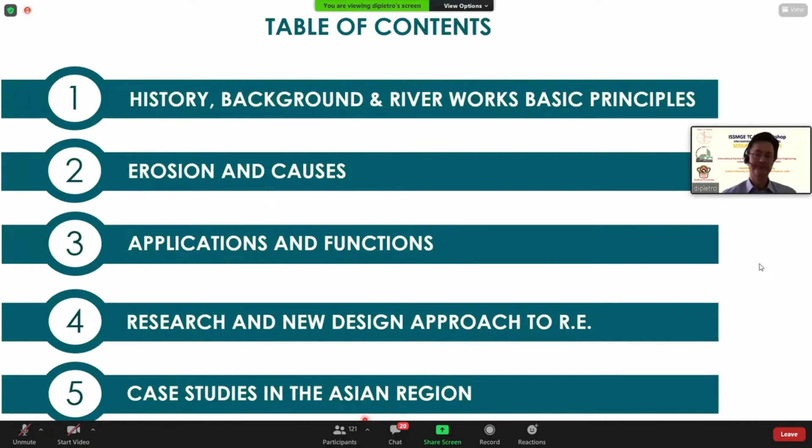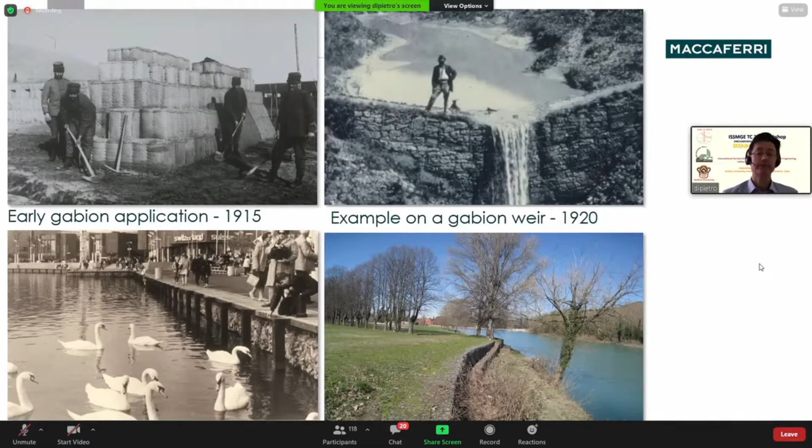But I would like to mention some basic principles when designing river works. The first postulate we learn from experience is that hydraulics is not an exact science.

When we design structures in river works, we make our choices based on current knowledge, know-how, and best management practices, assuming that natural events like rainfall, flooding, storms will be based on statistical data. This requires a cautious approach, and in most cases, to perform a risk analysis, analyzing scenarios beyond the design data assumed.

A modern and correct approach to river engineering requires recognizing two main types of requirements. The hydraulic requirements, meaning the base of technical knowledge, including evaluating the stability of a solution both from geotechnical and hydraulic points of view, using correct and sound engineering practices, design methods based on risk assessment and not fixed numbers, and considering how erosion will affect the surrounding environment. In other words, use an integrated river management approach.

But also, and most importantly, the environmental requirements, meaning to consider the river as a living environment. This requires understanding the rules, like the river being a dynamic environment that will change over time. In applying river engineering principles, minimize changes in the morphology and nature of the watercourse, and apply protection measures with proven ability to recover and reestablish natural conditions - that is, using sustainable systems. Finally, provide solutions aimed at balancing the ecosystems.

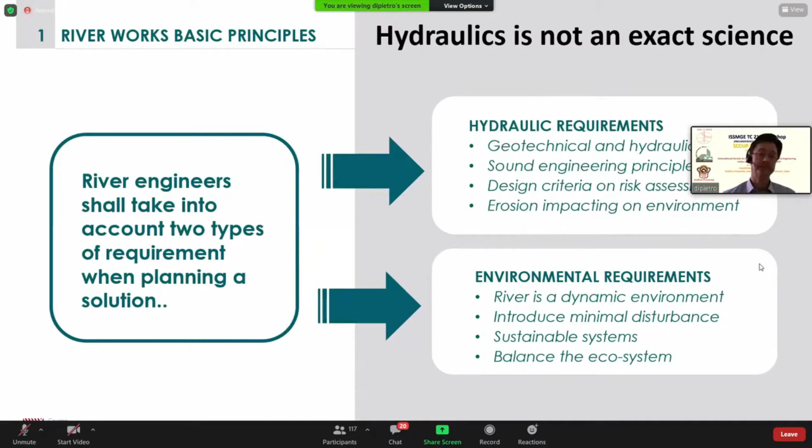River engineering requires starting from the location and characteristics of a watercourse, depending on whether we are in the mountains, at the foothills, or in the valley close to the river outlet. The three regions will be characterized by different climates, different soils, and different morphology.

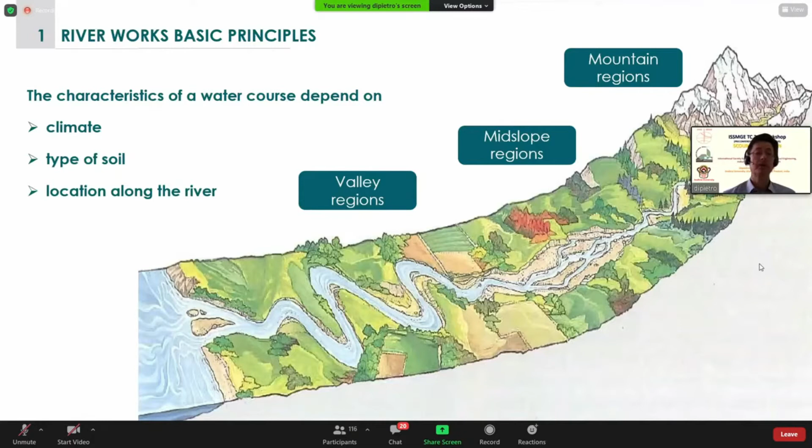In mountainous regions, watercourses are characterized by steep gradients - normally 5 to 10%, considering 10% as normal practice - with deep erosion, frequently characterized by an abundant and coarse bedload. Structures used to prevent erosion in these regions are grade control weirs, sometimes combined with secondary longitudinal bank protection.

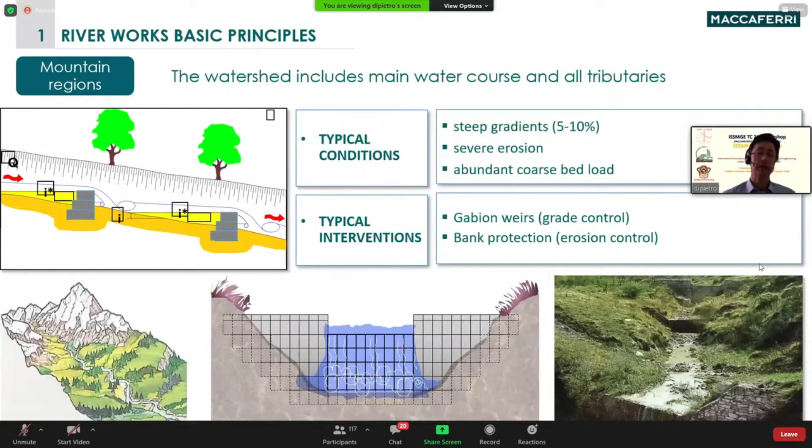On the mid-slopes, gradients become moderate, so we could consider 1 to 5% as a reasonable standard range. River sections start widening, forming a low-flow section, a thalweg, and a berm on the lateral sides, which will overflow during high floods only. In dry times, this sometimes forms a small island or rapids in short reaches. Typical structures may still be gabion weirs with a wider crest, combined with bank protections alongside, and small groins to facilitate sedimentation on curved reaches.

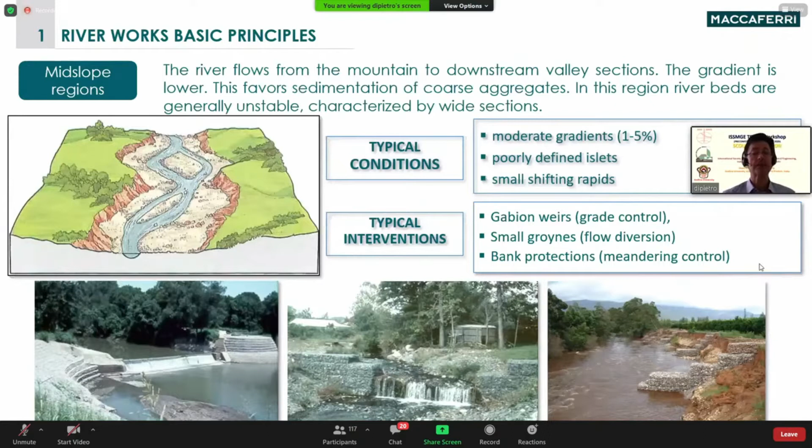Valley regions are the last segment of our river, where the watershed has collected most of the rainfall volume. Rivers are typically characterized by low gradients, less than 1%, low velocities less than 3 meters per second, and large discharges, more than 1,000 cubic meters per second - in larger rivers, tens of thousands of cubic meters per second - and a tendency to meander. Intervention in this region will be primarily to stabilize the river banks on bends or straight reaches and to favor sedimentation in sections where meandering tends to progress.

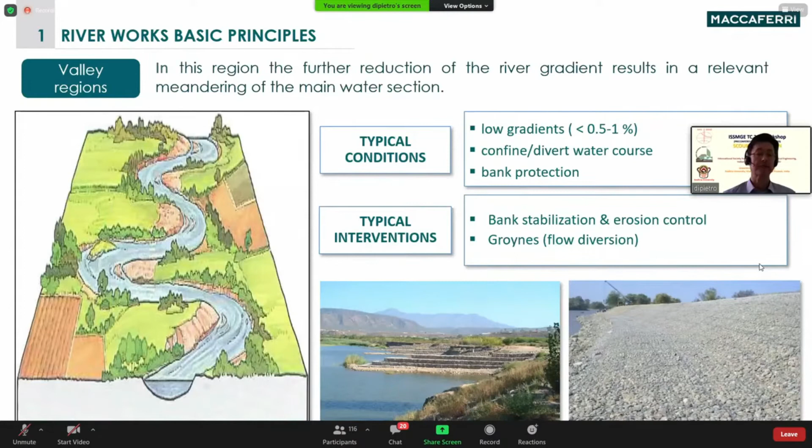The problem of floods in natural watercourses may require solutions like intervening on the banks - a bank protection - building a new embankment or dike, or, when space allows, creating an encroachment area where water may temporarily flow, a detention basin. In the mountains, we may alternatively consider reducing the gradient, and in other cases, a cross-section reprofiling may also be an option.

In case bank protection is required, the top of the slope may sometimes be raised when little space is available on the sides, or otherwise a section may be widened to convey a larger discharge within the river section. All this must not forget the possibility of site limitations like archaeological, landscape, or other environmental restrictions. Depending on the site location, geometry, climate, etc., the engineer shall choose the most suitable technology - varying from a large massive retaining structure, a hard armor, a soft lining system, or even simply natural self-sustaining soil bioengineering practices to help fast and natural recovery.

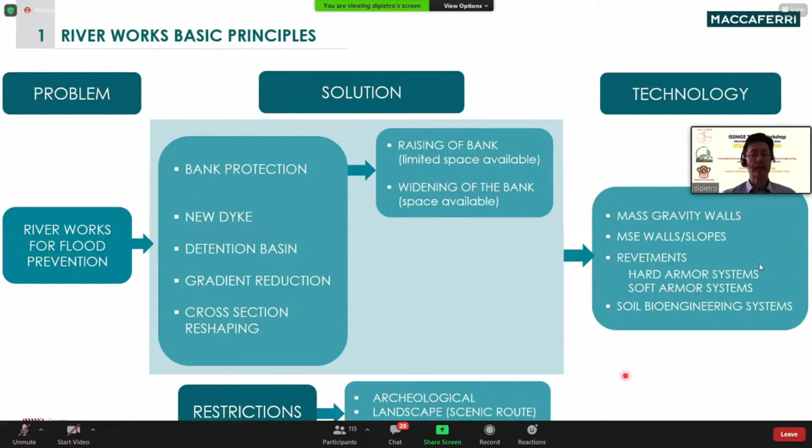Understanding rivers means understanding how erosion generates. We could start from the type of problem, then see what is the cause, where it is generated, and finally which effect results from such a problem. We could have drainage resulting in surface runoff, typically occurring on natural or artificial slopes, and finally generating erosion due to lack of vegetation or soil instability.

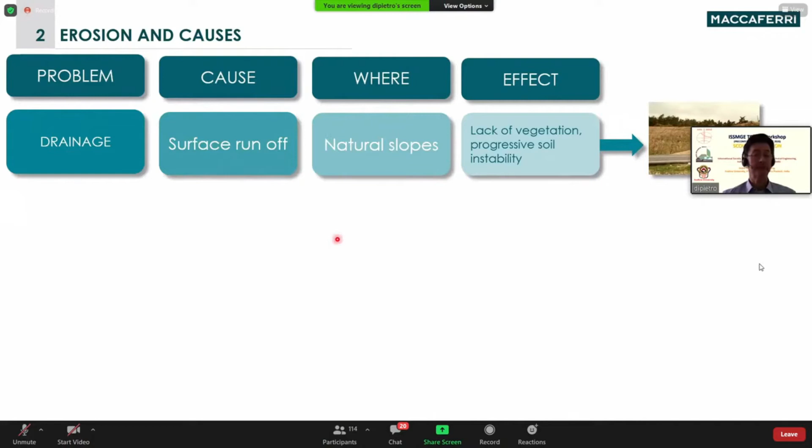Another type of problem is seepage, resulting in reduced soil strength, in embankments and slopes. Another problem is scour, formation of scour holes at the toe of riverbanks, critical for bridge abutments, generating progressive instability. Finally, wet and dry cycles or temperature variations result in the formation of cracks in cohesive slopes, resulting in progressive debris.

Erosion protection systems in rivers can be grouped either depending on their direction to the stream, lengthwise or crosswise, meaning along or across the riverbank, to prevent instability, or by conveying the flow as a drainage media. Sometimes they can be intermediate between longitudinal and transversal to the stream, to control meandering by favoring sedimentation.

In the first category, we can consider bank protections and bridge abutments. In the second category, we can group river crossings like culvert head walls, as well as guide bunds, more typical of some larger rivers, or bridge piers.

In the third category, we can group channelized streams or reaches where the rivers are canalized due to space constraints, typical of watercourses crossing urban areas. And in the fourth category, we may refer to the groynes, used to maintain the flow within a given path.

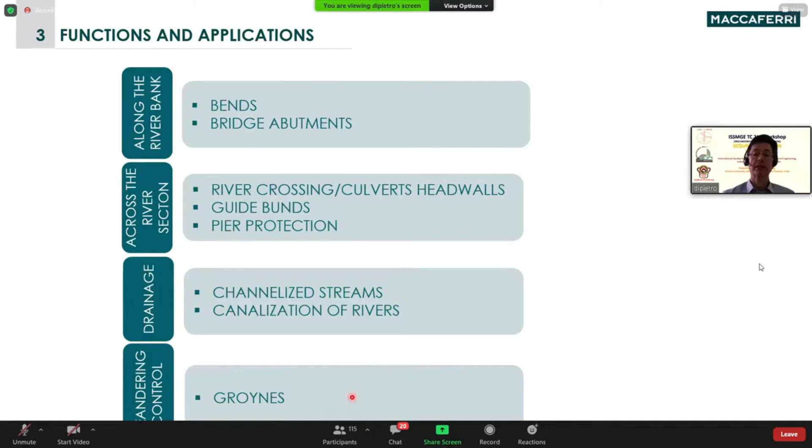Along the banks, rivers generate instability by eroding the toe and creating a failure surface. The solutions in this category may require mass gravity walls or linings, depending on the angle of slope.

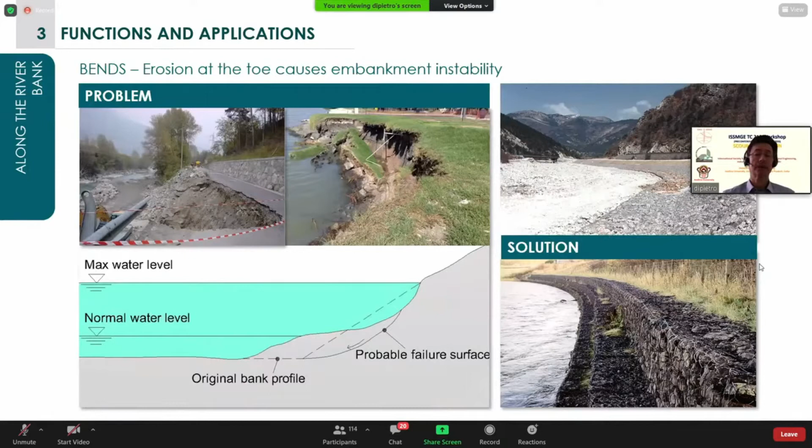When infrastructures cross rivers, we shall ensure that the bridge has a stable foundation. We can see examples of progressive erosion underneath the bridge due to lack of protection. On the right side, examples of how the main structure can be protected.

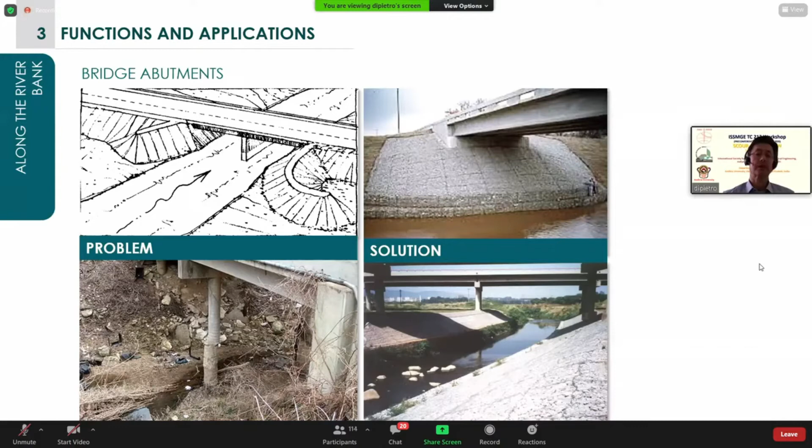Another example of lack of protection in a culvert structure. Here, the main contributing factor to the progressive erosion is the rigid apron, unable to follow the soil contour. The correct design shall consider flexible systems able to manage the transition zone between concrete, rigid, and soil, loose and erodible.

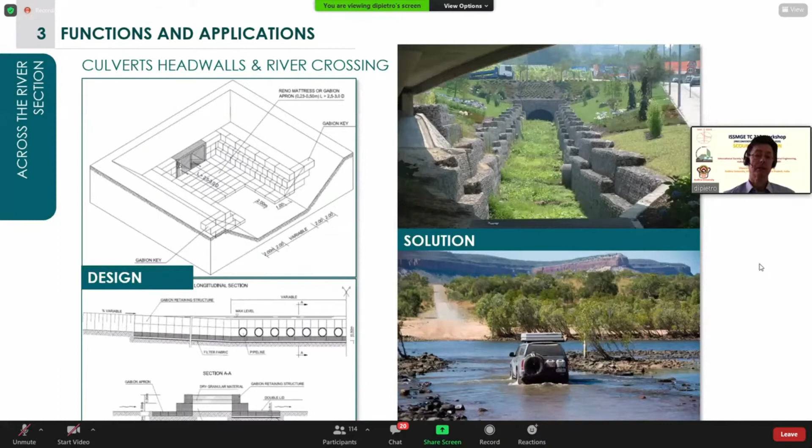Special applications are guide bunds, frequently used in the Indian region. Guide bunds are structures that divert the water to flow in the central zone of the river, to avoid river meandering across the large floodplain, with risks for all piers to have excessive scour during the high flow season.

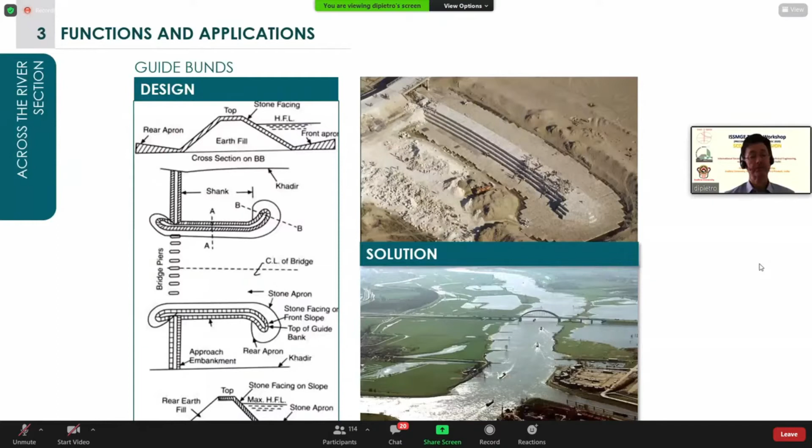Pier foundations are in highly erodible riverbeds. They can be subject to instability as piles are progressively exposed to the flow. These situations are still quite critical as we have rigid supporting elements, the piles, in contact with the loose erodible soil. Adequate protection with flexible structures to manage this transition, avoiding abrupt changes, will also be needed.

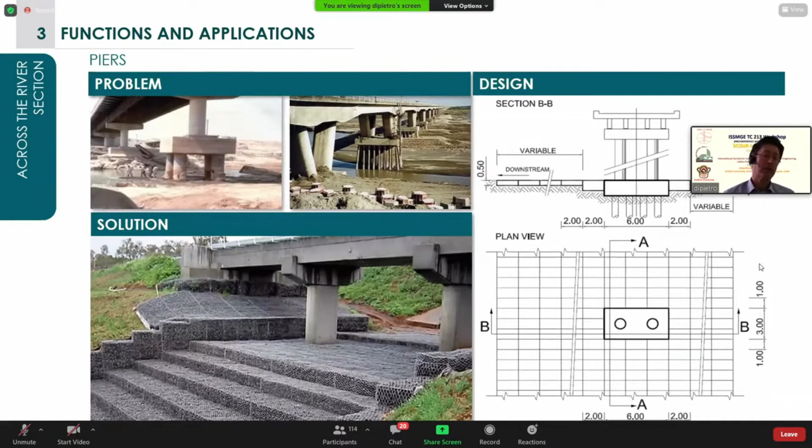Drainage channels like channelized streams collect and convey the water to a safe zone. Protection measures in these courses guarantee that the flow is safely brought to the delivery network.

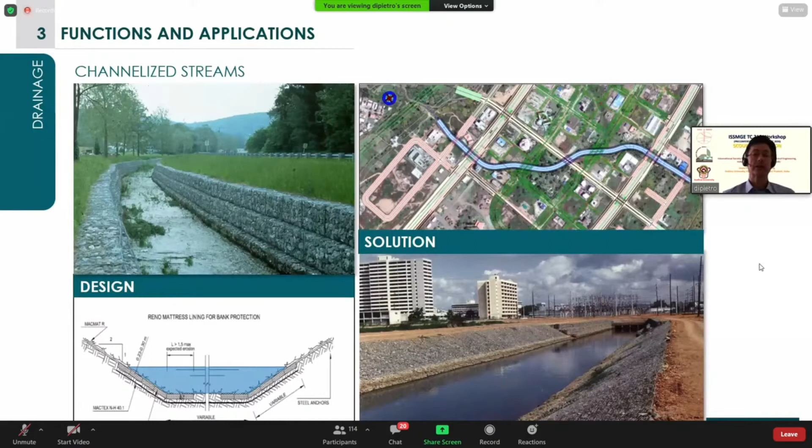In large floodplains, normally the groundwater flow as well as the secondary channel may affect the flow in the main channel section, sometimes forcing changes in its path. Considering that floodplains or areas adjacent to the main channel are often used for agricultural purposes in the dry season, gravity walls or revetment may be used to contain the flow inside the desired section.

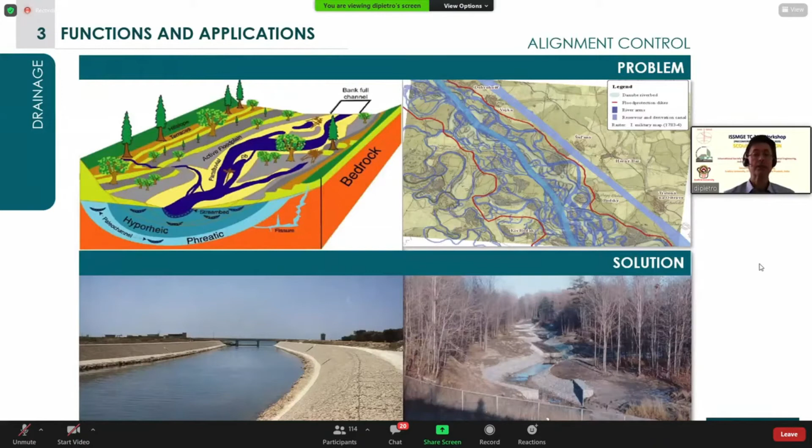Often in wide river sections, typically in alluvial plains, where meandering can be dangerous as it could progressively scour close to the infrastructures, groynes may be used to favor sedimentation in other reaches at the bed.

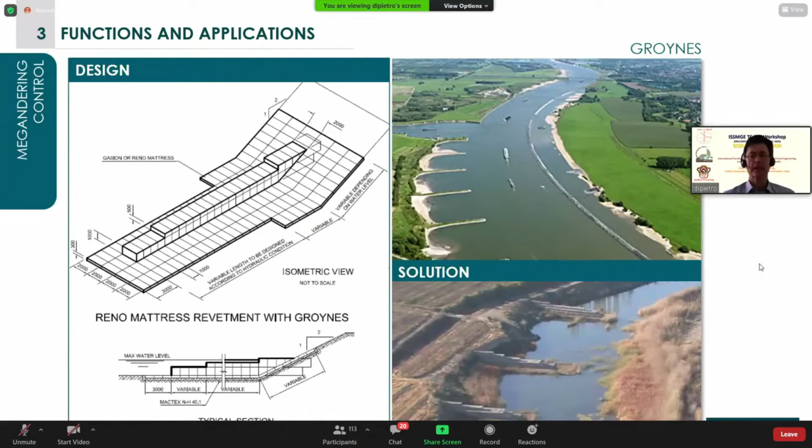Lateral spillways are used to provide a controlled water release, diverting the water flow from the river during the flood, or redirecting the water back into the river after the peak flood.

Spillways release water to prevent damage to the levee embankment. Except during the high water event, the water does not flow over the spillway. So spillways can be constructed with the crest lower than the top of the embankment.

The protection is usually made by concrete, stones, rocks, or gabions. Overflow spillways with significant hydraulic head will require a properly shaped crest, an energy dissipator downstream, and a protected release channel.

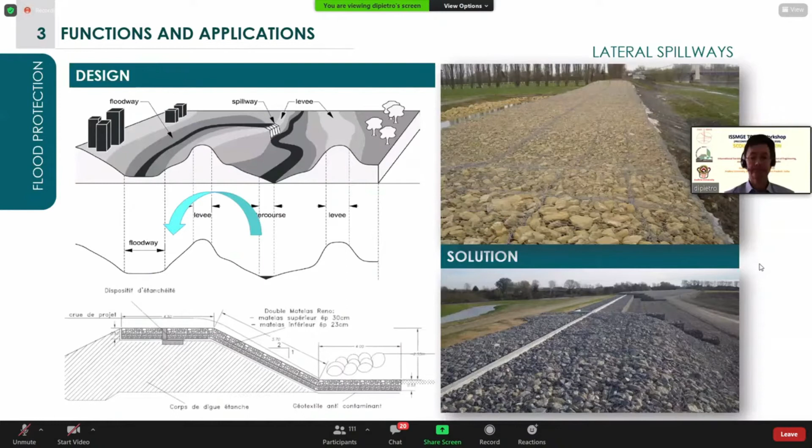Gabions and mattresses are flexible and permeable structures frequently used in river engineering works, as we have seen. It was in 1984 that gabions and mattresses became an engineered system, after the first experimental study done by Colorado State University. Back in 1984, there were no rules about erosion protection systems. The mattress stability was based on the principle that the confined rock should not move.

The proliferation, actually, in the hydraulics of open channels, an important change over the years has been the creation of standards.

The proliferation of several types of erosion systems required engineers to provide guidance for their selections to guarantee effective protection against erosion. In the United States, the most referenced standard defining performance limits for all erosion protection systems in open channels is ASTM D6460. Applicable to most types of erosion protection systems, from heavy duty to light revetments, this standard

defines the stability for a lining, either when no collapse or when limited erosion underneath occurs. In order to reevaluate the conditions of failure in line with ASTM for the new Maccaferri mattress, Colorado State University recently completed a research study

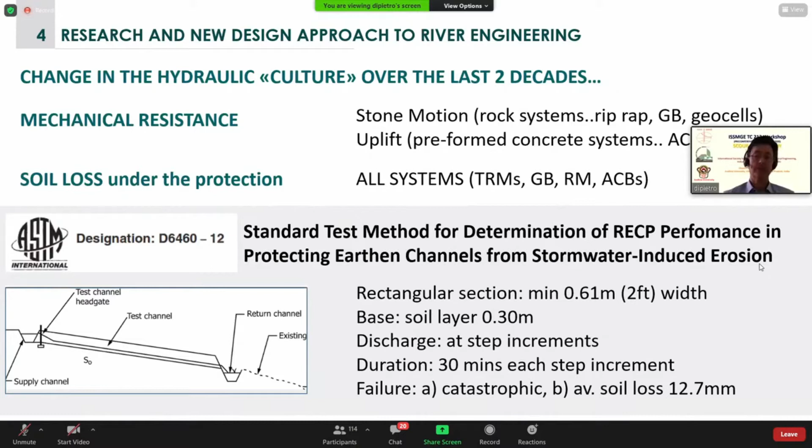performing a new test campaign. The research was developed in 4 steps. Task 1, preliminary, was aimed at analyzing the effect of the flow on the wire mesh and the tile only. This was performed by running the flow on an empty mattress. The scope was to see how much resistance to the flow the wire mesh alone provides.

Tasks 2 and 3 combined, always preliminary, were made by filling mattresses with rock of different gradings and uniformity. Here the combined presence of different partitions and stones allowed testing of the velocity dissipation through the mattress layer.

Task 4 was made on a larger flume, simulating the real flow regimes of an open channel. Based on results of the preliminary investigations, the best performing combinations of partition and stones were chosen. The tests were performed in line with the requirements of ASTM, which defines failure either by occurrence of a mechanical rupture or by reaching excessive erosion under the mattress.

The development of all 3 project phases required a thorough analysis of the various aspects. All in all, the research was completed in almost 3 years, requiring important financial investments, but also time and resources. On the other hand, the results brought up a valuable outcome, as overall the effectiveness of the best performing mattress resulted in a 73% reduction in thickness of bank protection compared to a conventional riprap lining.

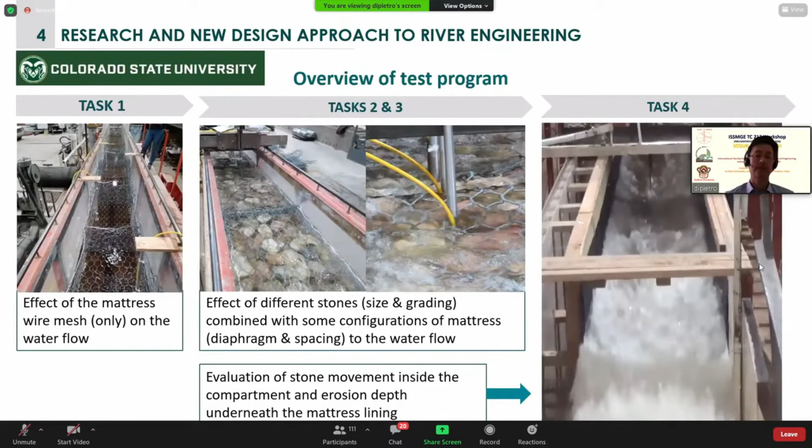The new research at Colorado State University allows introduction of a correlation with other factors not considered in the past, allowing optimization of limit performance on the new mattress, ultimately leading to the definition of the new approach applicable to the new generation of Maccaferri mattresses, the Reno Mattress Plus with the X-ties.

The Reno Mattress Plus with the X-tie has basically 3 main improvements compared to the standard Reno mattress. One is doubling of the mesh, making partitions much more robust with the double mesh.

Second is the innovative and much more durable new polymer coating, making the wire mesh more resistant to abrasion and sediments carried by the water, with higher UV resistance at high temperatures, as well as a much lower embrittlement temperature for cold climates.

And finally, the X-tie, a patented anchoring tool to firmly and securely connect the lid to the bottom of the mattress.

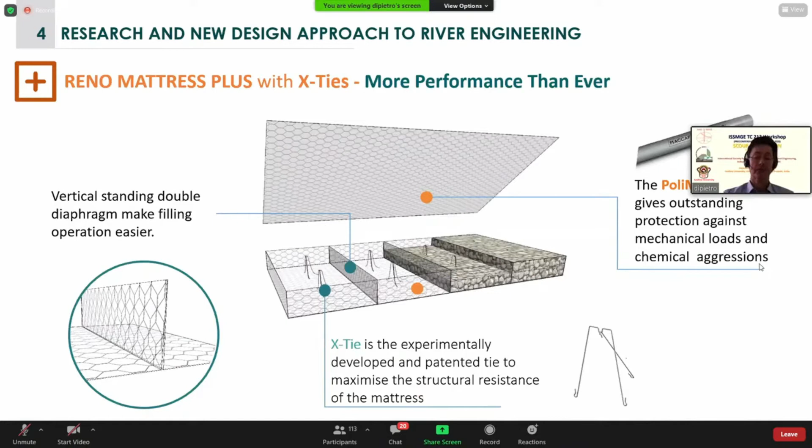We learned that the benefit of a double diaphragm partition, the rock size smaller and more uniform, and above all, the presence of a tightening connection between base and lid greatly boost the performance both against rock movement and against erosion. By interpolation, we could introduce partial factors in the Shields formula to include these contributions.

Here we can see the formula. In summary, comparing past and present in our design approach, we could say that the tractive force theory allows us to define an equivalent Shields coefficient to apply to mattress protection. This method, still in use for riprap, is focused on the limits of the lining's mechanical stability, the condition of no movement of the stone.

The new ASTM standard introduced a new way of looking at the performance of an anti-erosion system: mechanical stability, always, combined with controlled or limited erosion underneath, which is the main purpose of it.

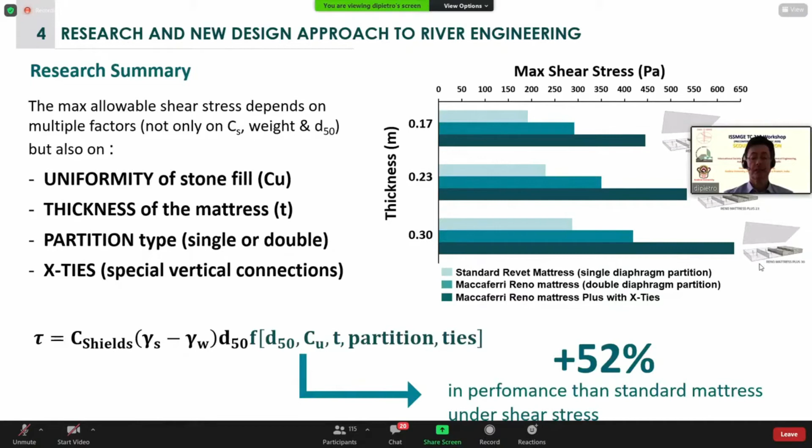These results today have been implemented in the new MACRA Studio, a user-friendly software to assist designers in the selection of most appropriate solutions for riverbank protection.

To enable designers to view different scenarios, the software provides multiple choices, pulling out from a database shear resistance values for other common anti-erosion systems as well, allowing also a choice to model a channel section only with natural materials like bare soils or vegetation from light to dense.

When choosing Reno Mattress Plus, the software will require the relevant parameters to use, like the grading for the rockfill, the thickness, and the assumed roughness. Based on these variables, a database will provide the equivalent allowable shear resistance for that mattress configuration.

MACRA Studio is a simple tool with a user-friendly interface, able to model open channels of any shape, from simple trapezoidal to double trapezoidal, or virtually changing geometry, checking multiple discharges, or profiling slopes, partly with natural vegetation and mattresses or gabions, is very simple to do.

Results allow the designer to quickly make a decision considering various scenarios and best performing configurations.

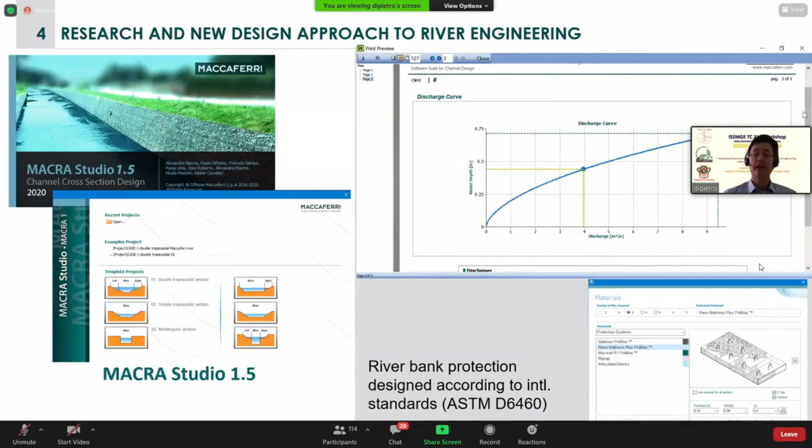Let us now move to the last part of this presentation, a brief overview of 5 interesting case studies in the Indian territory. The first one is the Mahanadi project.

The location of this project is in the eastern part, eastern side of India, in the Orissa state, near the town of Paradip, south of Kolkata, where the Mahanadi River flows into the ocean.

After the cyclone of 1999, both rivers Devi and Mahanadi suffered from severe erosion. The effects of the tidal waves, combined with water velocities of 2 to 3 meters per second, dislodged the existing protection works. The project received financial aids by the World Bank.

The riverbanks needed to be reconstructed using the available fill. The 2-to-1 slope was stabilized by dumping loose rocks, riprap, on top of which a lining protection of 0.5 meter gabions was installed. A large part of the protection had to be installed underwater, and that was one of the biggest engineering challenges.

Gabions had to be pre-filled and launched by crane down to the riverbed to a depth of 15 to 18 meters, so quite a challenge. Cost effectiveness was one of the successful project's outcomes.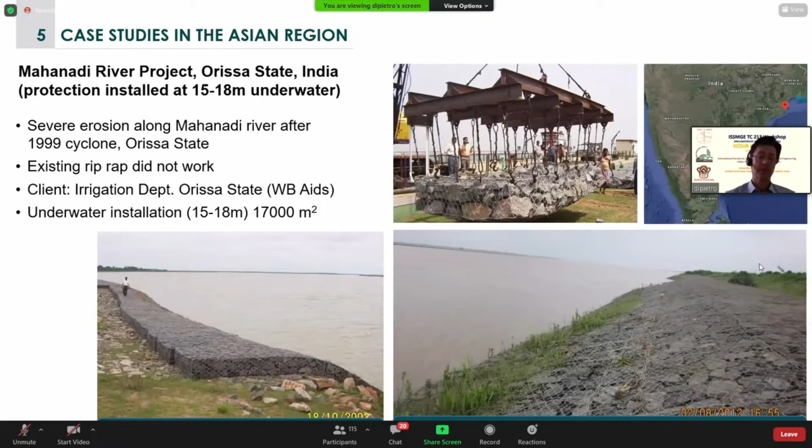The second project is the Valmikinagar project. This location is on the northeastern side of India, very close to the border with Nepal in the Bihar state.

The Bihar Water Resources was looking for protections on the left bank just upstream of the Gandak River barrage in Valmikinagar. The Gandak River in this section has a discharge in the range of 24,000 cubic meters during the monsoons, resulting in severe erosion on the left bank and damaging the gates of the Gandak barrage.

So approximately 1,080 meters length of the bank had to be reconstructed and protected.

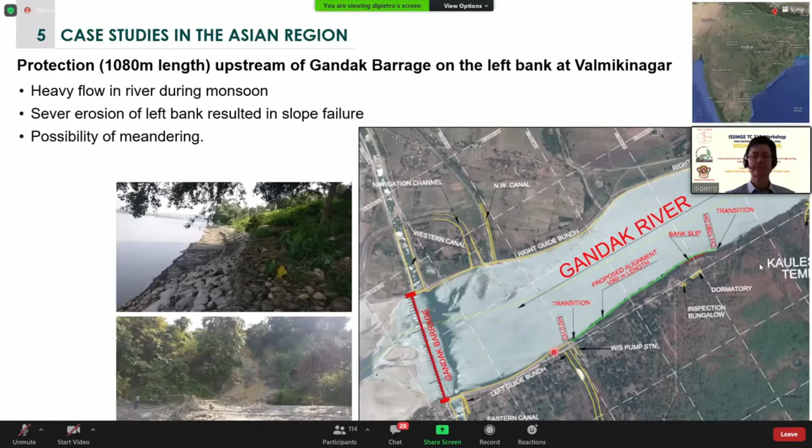The retaining structures was designed for a seismic zone of 5 as per the Indian standard. The retaining structure required to be flexible, permeable, and able to withstand pore water pressures and protect against scour. So in order to meet these requirements, the solution was divided into 3 parts, in 3 sections.

The reinforced soil retaining wall with a permeable gabion fascia, the slope stabilization on the upper bank with a synthetic erosion control geomat reinforced with a double twisted mesh, and finally the scour protection with a mattress apron and a gabion key. This solution was chosen because of the high permeability, flexibility, and environmental friendliness.

You can see here some details of the structure. The soil reinforced structure was used combining geogrids, high-strength geogrids, and steel wire mesh, a soil reinforced system with a gabion fascia.

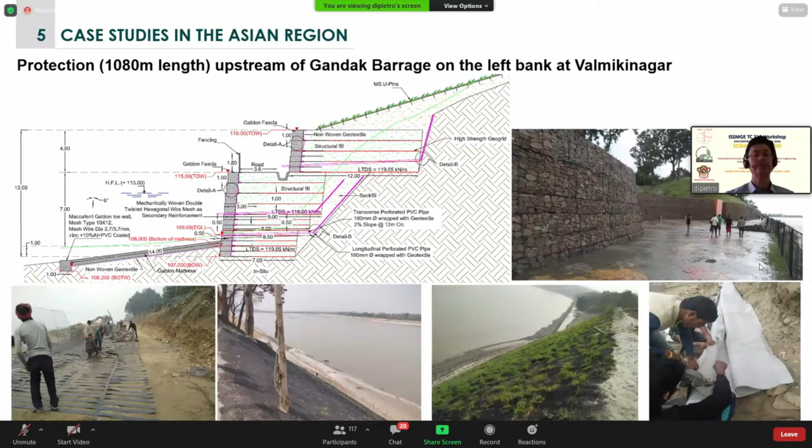The third project is the Gopalganj project. This is approximately 100 miles south of the Valmiki along the Gandak River, near the city of Gopalganj. Another project which required an intervention of erosion protection.

Here, during the construction of a bridge across the Gandak River, due to a sudden increase in discharge, the river started eroding the bank at the toe of the guide bund and downstream, and at the downstream end.

Riverbank protection measures were required, in this case urgent protection works, using the available sand and the least amount of stones, which were scarcely available in the area nearby.

To meet this requirement, sack gabions lined with geotextile and filled with locally available sand were proposed. Here you can see a picture during the installation of these units.

Gabions were factory assembled and supplied in a folded form. Construction required opening and holding the gabions to allow fast filling, using a special arrangement designed for this purpose.

The protection was completed in a very short time, and it was extremely successful.

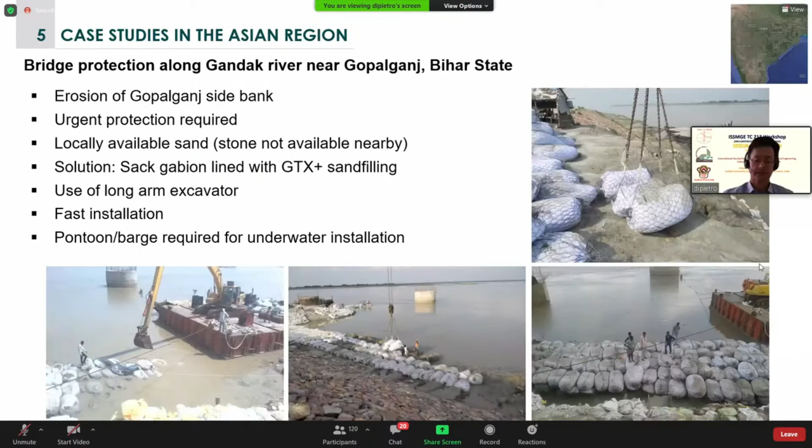The fourth project is quite a challenging one. This is the Budge Budge project. It's unusual because it involves an effect called the tidal bore.

The location is in the suburban area of Kolkata, in the southwestern side in West Bengal. The Cheviot Group has a factory located along the river Hooghly.

The river in this section is in its estuary zone, and it is subject to heavy tidal bore phenomena, which cause intense turbulence and hydraulic jumps.

Here you can see a couple of pictures. The structure was approximately 6 meters in height, with a slope of 2:1. The thickness of the system was analyzed and considered to be approximately 3 meters.

Geotextile bags and sack gabions filled with sand were adopted to fill the embankment core. The geotextile bags were made of woven polyester geotextile material. Sack gabions lined with geotextile were filled with dry sand and laid in position.

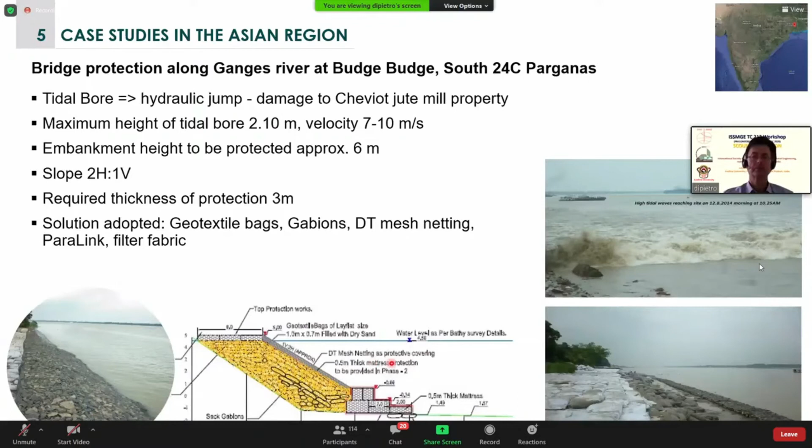In order to ensure solid and firm function to the gabions used at the toe protection, an additional high-strength geogrid reinforcement was wrapped around the units.

The two lower images show the protection on the embankment before and after the installation of the upper gabion layer, to cover everything.

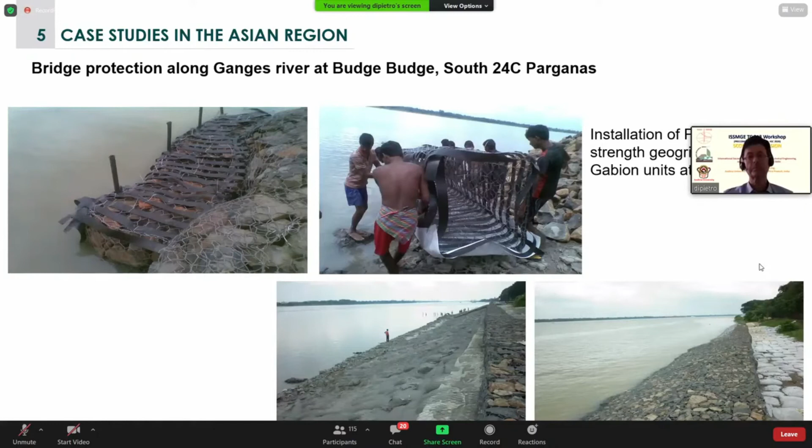The last project to mention is the Delhi Noida Yamuna River project. The location is south of Delhi in the suburban area.

In 1999, the Delhi administration proposed a road bridge across the Yamuna River, downstream of the existing interstate bus terminus bridge, for the mass rapid transport system, about 2 kilometers upstream of the existing Okhla barrage.

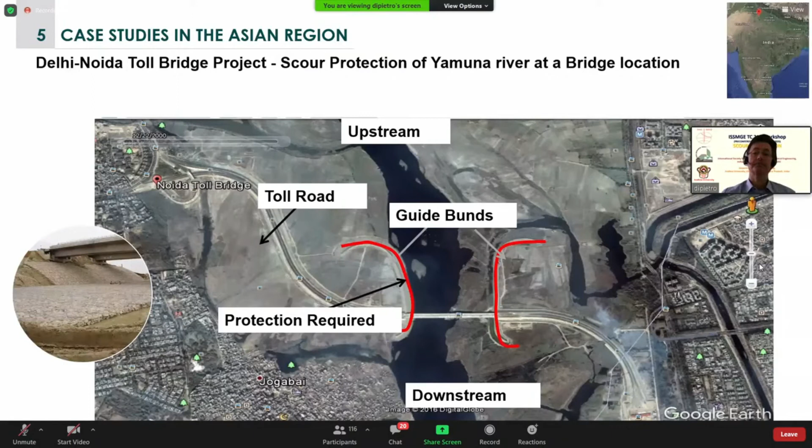Due to the presence of the new structure, it was anticipated that velocity would be high and the bridge piers would need protection. The river works were designed for a discharge of 15,000 cubic meters per second, with a maximum velocity of around 3.3 meters per second.

The original design consisted of a massive slope protection with 1 meter thick gabions and stones, with a cost estimate of about 275 million Indian rupees, around 6.1 million USD.

The alternative proposal considered was to use a single layer of 0.5 meter gabions. The interesting point is that this resulted in a volume reduction of about 50% compared to the original solution.

This resulted in an overall saving of nearly 130 million Indian rupees, accounting for approximately 2.8 million US dollars. So quite a considerable saving.

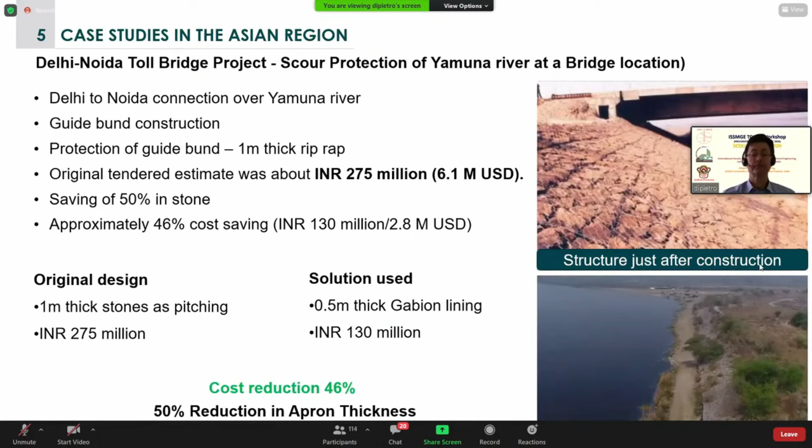So in conclusion, in this presentation we have seen some important points, I guess.

Number one: erosion is a result of natural environmental change. We shall understand the rules to develop sustainable solutions.

Number two: river works require solutions suitable to integrate with the surrounding environment, minimizing disturbance to the ecosystem.

Point number three is a very important point, an achievement of modern times: erosion control systems shall be tested in accordance with a common standard procedure.

Thanks to new developments, the ASTM standard currently allows this to be done, and this is the first guideline for most systems.

Results for new Reno Mattresses show an effectiveness, in accordance with this ASTM, of over 50% compared to conventional riprap. And when I mention 50%, I'm referring to the total cost of ownership.

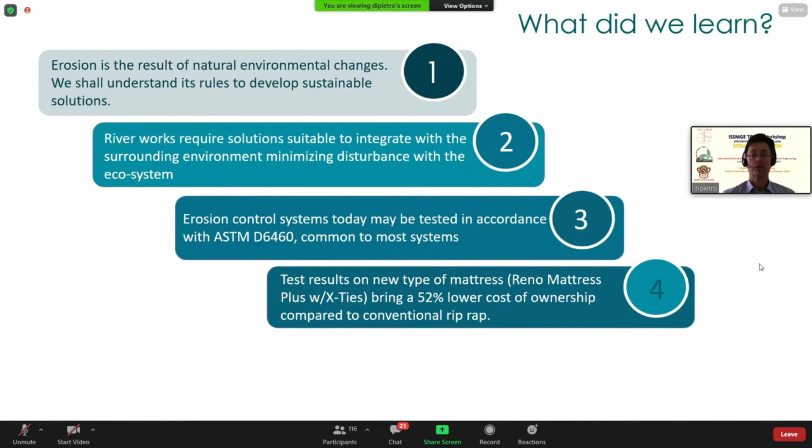That includes construction, maintenance, and everything, during the lifetime of a structure.

And the number of projects built around the world, of which we have seen a few examples in India, prove the effectiveness of these erosion control systems, as well as their environmental friendliness, of course.

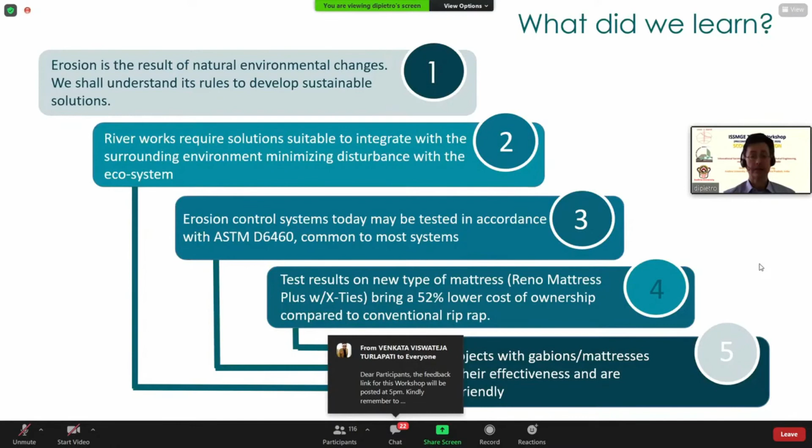Well, this concludes my presentation. Thank you for your attention. And of course, I am more than available here to answer your questions.

And do the current protection methods help in prevention of soil from the effects of heavy floods, such as the heavy floods that occurred recently in the northern and northeastern states, where many regions were submerged underwater?

Yes, so that was the question: can the methodology be adopted when there are heavy floods, especially in north and northeastern states? Yes, absolutely. Thank you for the question.

Yes, the procedure we are putting in place - and I was fortunate to be one of the members developing ASTM D6460 - allows us to apply the effect of a flood to any erosion system, because during testing we have the ability to define different slopes. So we can even design for a spillway generating the right amount of allowable shear stress, simulating realistic scenarios. So yes, my answer is absolutely.

Thank you very much. Any more questions from the audience? There is one question from Alok Ranjan: you referred to a river near Gopalganj in Bihar - are the soil conditions different from what you encountered in Valmiki Nagar?